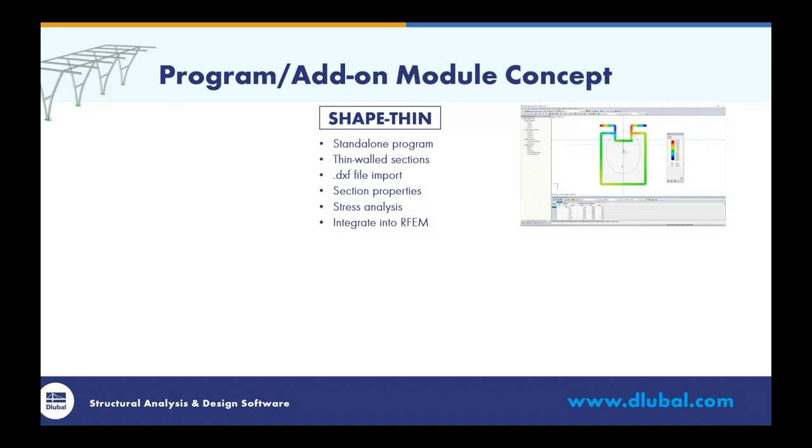These section properties will be calculated. You also have the ability to run a basic stress analysis directly within the program, which we won't be taking advantage of today, but it is an opportunity to do so. Then we take these cross sections along with their properties and integrate them into our FEA program, RFEM.

RFEM, again, is a separate program, and this is where we can model our structure entirely. We also can integrate with BIM software such as Revit, Tekla, and AutoCAD. We can fully load the structure and set up our load combinations, again according to the ASCE 7 as well as many other international standards, and eventually we get a full analysis.

Now, the analysis will provide us with design internal forces, deflections, support reactions, and we can take this analysis information into our own tools to do the design. Now if we'd like to do design within RFEM, this is where we'd want to take advantage of the design add-on modules, and in particular, today we'll be looking at RF-ALUMINIUM ADM.

So this is nothing more than a dialog box within RFEM that allows us to do member design for aluminum per the ADM 2010, the 2015, and we have both ASD and LRFD. This does include both ultimate and serviceability design, so we can check deflections as well. This also includes custom extruded sections, which we'll see today, where we take this section from SHAPE-THIN into RFEM and design it per the ADM.

Now, this is for unwelded member design. Hopefully at some point in the future we hope to add the welded checks, but for now keep in mind that it is only for unwelded members.

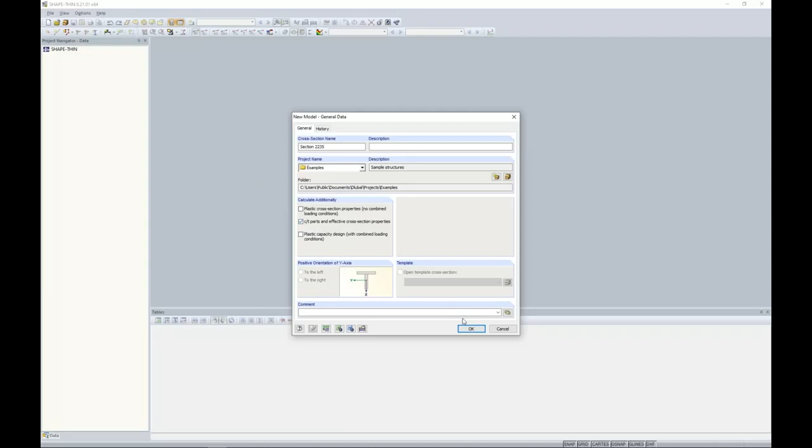This includes flanges, webs, any of the lips or extruded sections. Why this is so incredibly powerful is that when we take this information of these width to thickness ratios into RFEM and eventually into the aluminum design module, we can actually check all of them for local buckling. This is not something other programs can do, but it requires a bit more additional work within SHAPE-THIN itself to define this section, and we'll go ahead and see that now.

When I click import, we are brought into our graphical view where we can place the DXF background layer. There are a few options for how we want to place this DXF file, and I'll choose this one where I can further edit it. I select this center node, snap to my origin point, right click to exit this dialog box, and now you can see this background layer here.

It's not so simple that we can just mesh based on this import to calculate the cross-section properties. We somewhat need to trace over this background layer again to determine the width to thickness ratios for eventually local buckling. But we do have some powerful tools that allow us to do that fairly easily.

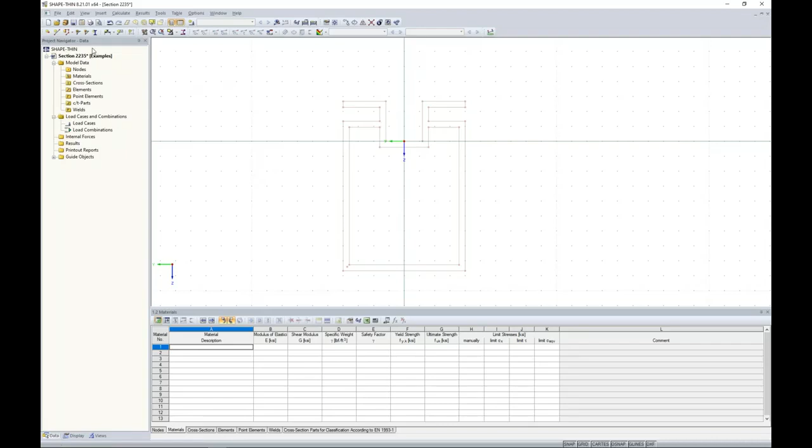Under edit, we have set elements with DXF template. The first option is to set the center lines. I zoom in and select two lines, and you'll notice the program automatically places a center line between the two selection lines. I'll focus mostly on the left side of the structure here, because once I define my elements on the left side, I can mirror it to the right side.

In addition to setting the center lines, we have this fourth option to set the elements. We can manually draw in our elements with a new line, but we want to take advantage of these tools that make our life a little bit easier within SHAPE-THIN.

So I want to set my material now. I can open up my material database, and on the left we have our filters. We can filter to metal, to aluminum, to the ASTM, and eventually the ADM 2015. We have quite a long list of all the aluminum materials directly from the standard.

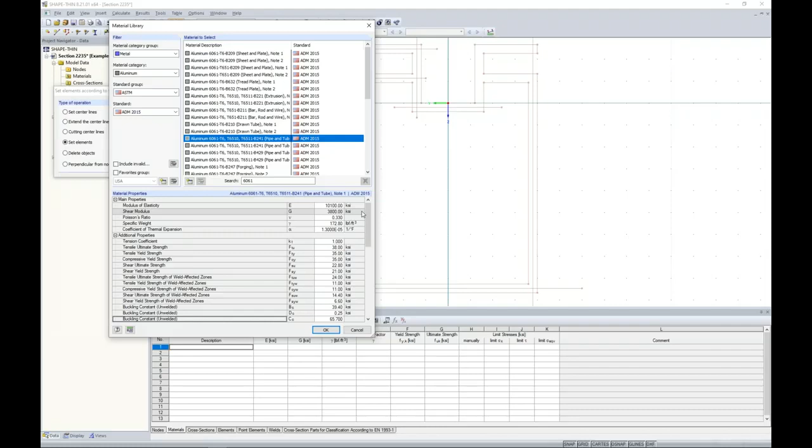If I want to search by a particular material, for example, I can type in 6061 and see all the applicable materials, where I'll choose 6061 T6 for pipes and tubes. Now all of my material properties are defined here. Quite honestly, the material definition isn't so important within SHAPE-THIN if you're not doing a general stress analysis, which we're not today. Once we get into RFEM, we'll actually have to redefine the material anyway, but this is just a good introduction of where you can find the materials within the database.

Now what I can do is simply click on these center lines, and the program detects where the outside boundary lines are for the thickness of these elements.

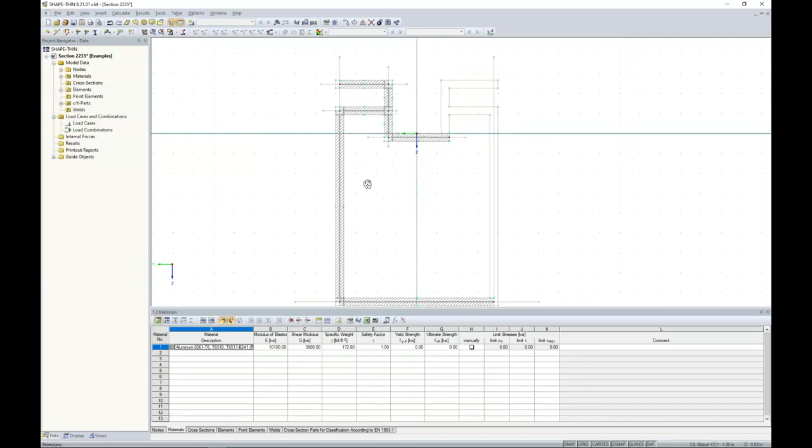Once I've completed, for the most part, the left side of the structure, you'll notice up here I want to actually drag this one element to the end. No problem, I can just drag and drop it, and it will snap right to that end point.

I can highlight all of my elements here and use my mirror tool. The mirror tool is exactly like what we'd find in AutoCAD, for example, where we can create a copy. We can mirror about the global z-axis and the origin point. I click OK, and now the program has created all of the elements on the right-hand side. It does create a couple small segments that I can just simply delete with my keyboard.

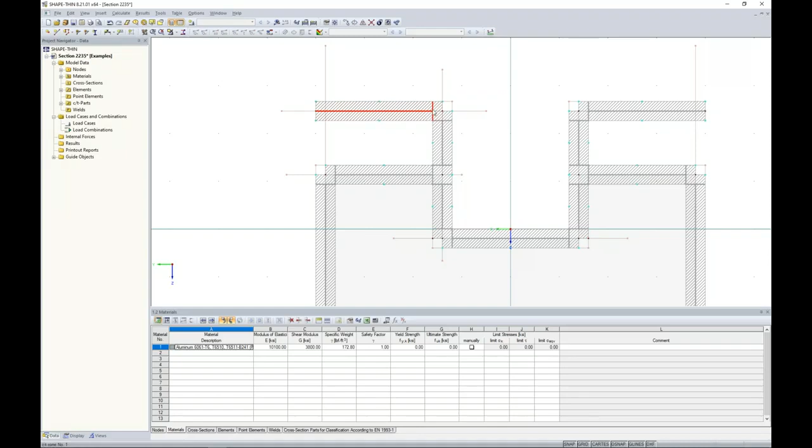Now you'll see these symbols at each element, and this is the width to thickness symbols, those C over T parts. This is what's recognizing width to thickness, but even more so, you'll notice that at these closed ends we have what's called, looks like a T symbol, but at the open ends we don't have that same symbol. This again is important for aluminum design to tell the program how the edges are supported. Over on the right hand side we can see that it's supported, but over on the left hand side it's not supported. Again, important for local buckling.

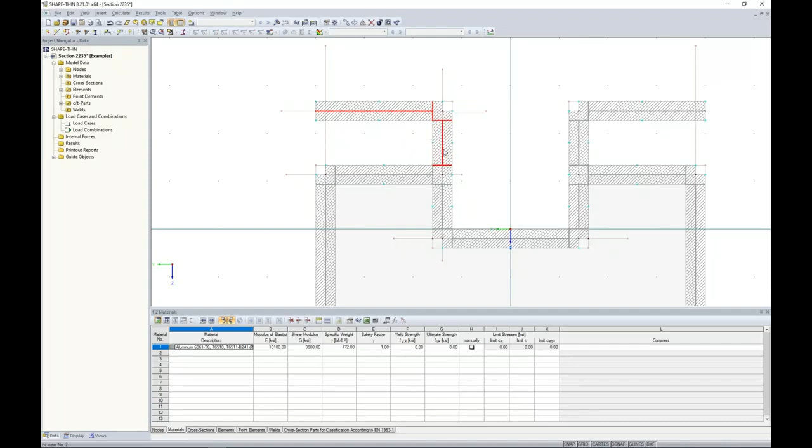When we look at one of these other elements that's supported on both sides, we see that T-type symbol on both sides.

So that's all that we need to do, and now we're ready to run our calculation to determine the cross-section properties. When I go to run the calculation, I will immediately get an error, and it says material number 1 Fy is not positive.

This is the yield strength for my aluminum, and I can immediately look down here to my table, and the program jumps to Fy where it's set to 0. The reason for that is because aluminum has different yield strengths depending on if it's for tension, for compression, or for shear. So all we need to do is set some type of placeholder here. Fy equal to 30 is perfectly fine. That's the reason why the program populates 0 there.

So we can rerun our calculation, and now we can see that we are presented with our results. Most importantly, if we take a look at table 4.1 for section properties, the program has automatically calculated all of the cross-section properties for us, including area, moment of inertia, warping, things like that. So everything has been done automatically according to my calculation.

Now it's very important that I save these results. You have to save the results with the cross-section properties, because in order to integrate in RFEM, we need to know those, and that only occurs with the saved results. We will get a message in RFEM when you try to integrate a SHAPE-THIN section without running a calculation first. So that's all that is required from the SHAPE-THIN side.

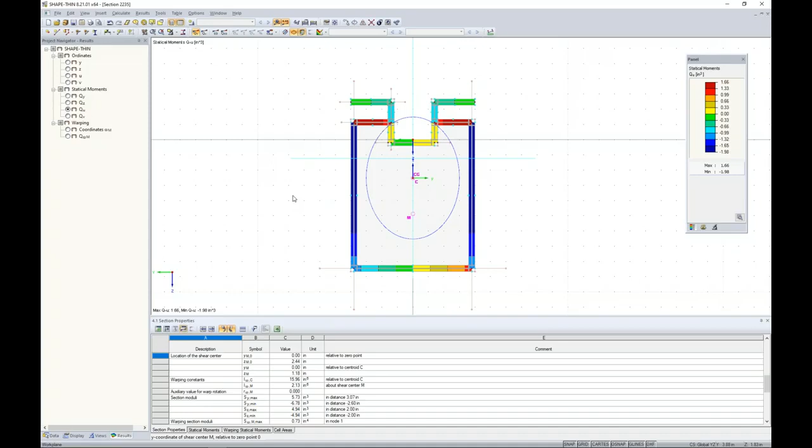So now what we can do is jump to RFEM. And in RFEM, you'll notice it has a very similar interface to SHAPE-THIN. So what's great is that if you know RFEM pretty well, then SHAPE-THIN should come pretty naturally.

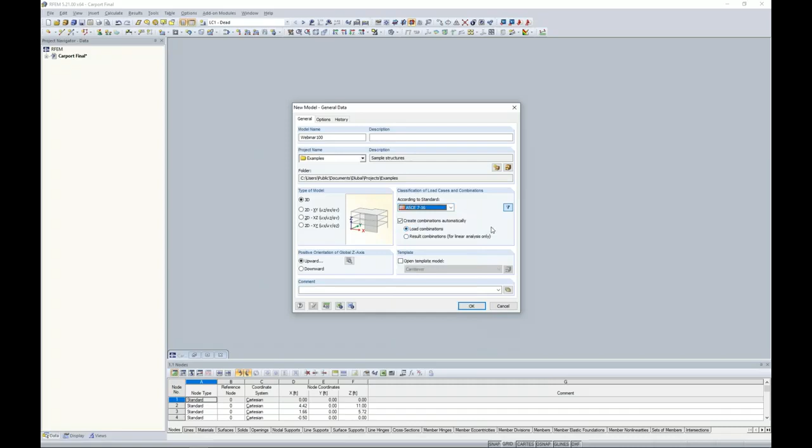We want to give this one a name, so we'll call this one Webinar 100. The type of model is 3D. We can generate the load combinations automatically according to the ASCE 7 2016. You can see in this drop-down box we have many other international standards as well, including the NBC 2015. You can always uncheck this checkbox here, and that allows us to manually create the load combinations instead. But today we want to take advantage of the load combination generator, so we click OK, and we are brought into our main program RFEM.

To give a quick overview, for those of you who are not familiar with RFEM, we have our graphic window right here in the center, and we'll begin to model our structure, and we'll see that built up visually here. Down at the bottom is our table, and we can always import and export data to and from Microsoft Excel. This includes our results that will eventually be presented to us in table format as well.

Over on the left is our project navigator. As we begin to generate this model, all of my input data, including my loads, my load cases, and combinations, will be available to me within the project navigator so that I can make quick changes to entire cross sections or to entire material groups.

If we scroll down a bit further, this is our long list of add-on modules. This is again why we have the concept of only pay for what you use, because quite likely you won't utilize most of these add-on modules depending on the materials or the international standards that you utilize for your projects. Finally, we have our tools up at the top, which we'll be utilizing today.

That brings us to the creation of our first column here, where we will go up to our quick tool to draw a new member. So when we choose this option, we want to select the member type beam. We can open up our cross-section library.

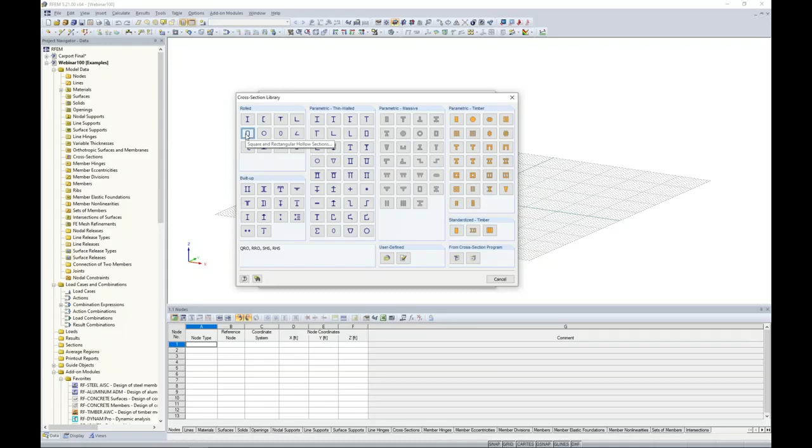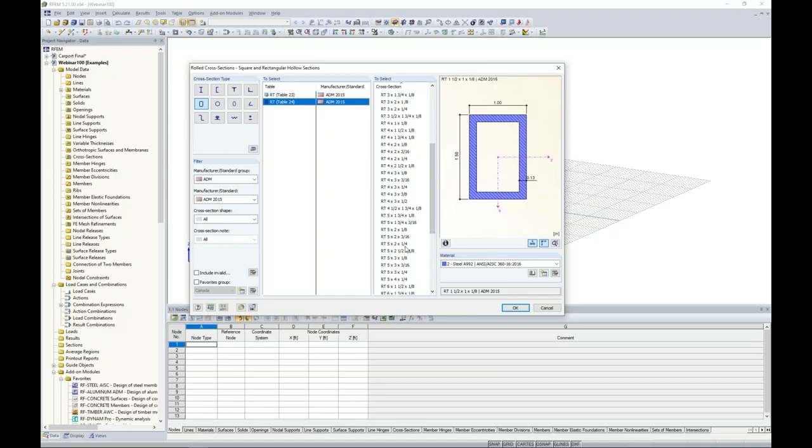For aluminum sections, we will typically be working with the parametric thin-walled sections, or we can take advantage of the ADM sections directly from the standard itself. So with that, we will choose a hollow square section for today. I click on my HSS sections, filter over to the ADM, and we'll see an additional filter to the ADM 2015. Now for my first column, I want to select a 5 by 2 by 1/4, and I can just choose it right here in my drop-down box.

Now the material by default when we first open up the program is 4,000 psi concrete or steel A992. So what we need to do is choose a new aluminum material from our database.

Well, that's quite easy by launching our material database, and this should look very familiar. It's almost exactly like what we saw within SHAPE-THIN. We can use our filters over on the left to filter to metal, aluminum, ASTM, and 2015. Once again, I can type in 6061 and select 6061T6 from my list here for pipes and tubes. All of my material properties are presented in this table.

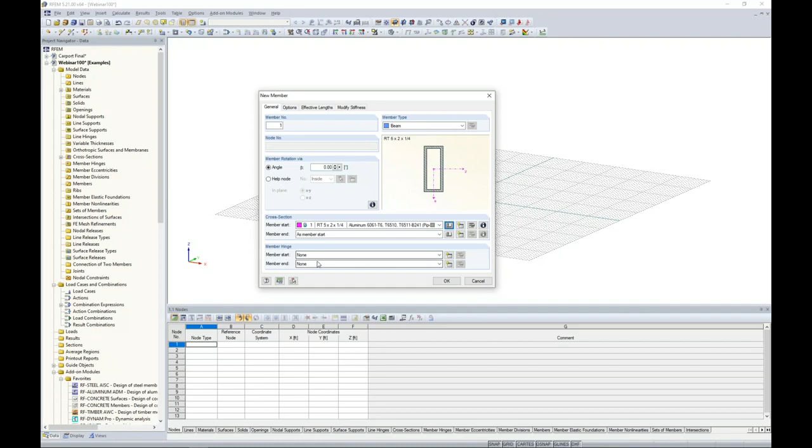I click OK, I click OK. And just to preface this, our model today will be fully fixed, but if you did want to set a pinned member end, you would do so within the same dialog box by creating a new member hinge. Leaving everything fully fixed, that is what the type none means, so we'll go with that for now. So we want to begin by drawing our column, but I want to change around my drawing grid here to the vertical direction.

I can do so by changing my work plane into the XZ plane. I can scroll down, and instead of a straight line, I actually want to create a curved column, and I can do so by selecting an arc here.

So I snap to the origin at 0, 0, 0, and then my second point can either be defined on my work plane here, but in my particular case, I don't have exactly 1 foot increments for my second point, which is what the default is for my drawing grid. So what I can do is just type in the coordinate points directly at 4.42, 0, and 11.

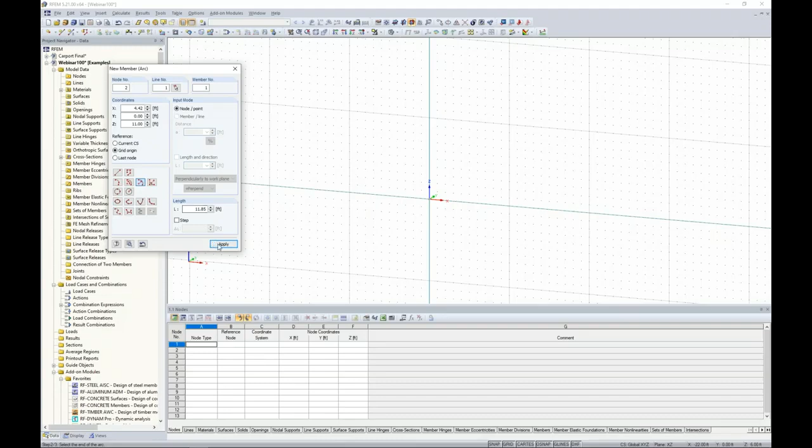Now you want to make sure not to drag your mouse outside this dialog box because as you'll see, everything resets to the current position of my mouse on the work plane. So we'll retype that in at 4.42, 0, and 11. We scroll down here to apply. And now you can either define the radius by clicking on the work plane, or I can just type in 30 feet on my keyboard and hit enter. And so now we should see the curved aluminum column shown here.

In a similar sense, we want to go back and draw a new member. And I want to take advantage of the exact same cross section, the same material. I click OK, and we want to create another curved member. So we'll choose the arc option.

Now my first point, again, doesn't fall at these 1 foot increments, so I can specify negative 0.5, 0, and 0. I click apply. Now my second point is going to be negative 3.5, 0, and 11, and I can hit apply. Now you'll notice that my radius is actually curving the wrong way.

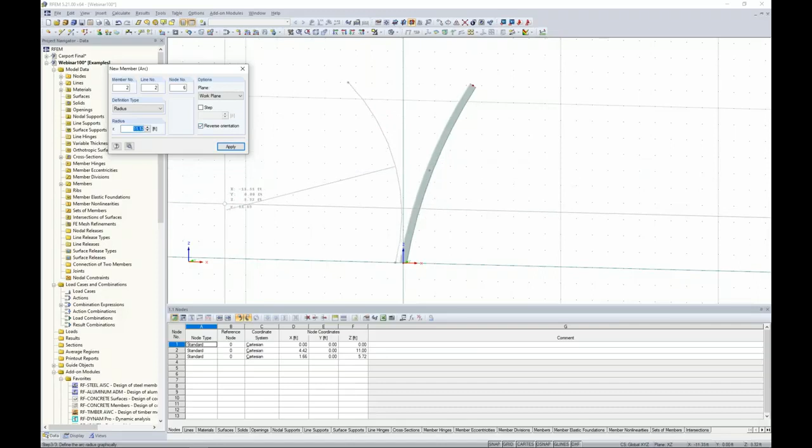Well, that's no problem. All I need to do is check the checkbox for reverse orientation. I'll type in 40 feet on my keyboard and hit enter. And so now we have our second curved aluminum column here.

The next thing to do is to apply some type of intermediate brace between these two columns, and I want to do so at some nodes along the member length that I need to create. So I can right click on my right column and divide the member by a certain distance.

With this distance, I have the opportunity to choose the projected direction Z. So what I want to do is add a node that is 5.5 feet in the vertical direction starting at the base of the column. You can see here which side is the member start and the member end based on this black arrow here. I type in 5.5 feet for my member start. I click OK. And so now I have divided this member, which has created an intermediate node there.

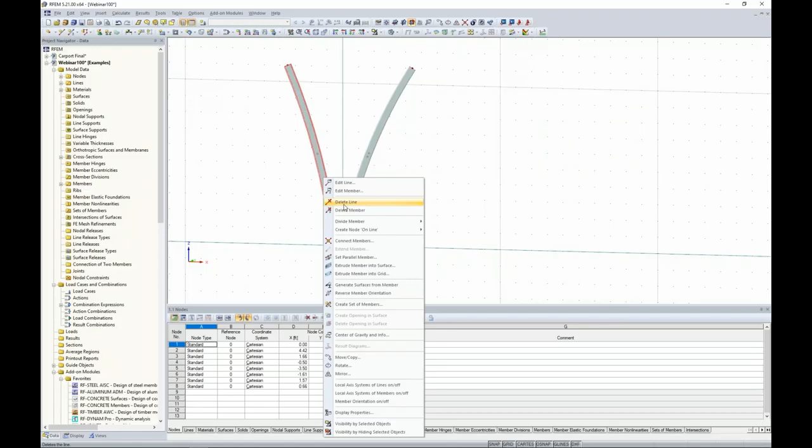I'm going to do the same thing with the left column. I'm going to right click and divide the member by a certain distance. Again, we're going to choose the projected direction, but this time it's going to be 4 feet from the member end. You'll notice that we have the reverse orientation for this column, which is no problem at all. So now we have split apart this member as well.

I want to go back to drawing a new single member. And once again, I'm taking advantage of the exact same cross section, the same material. I click OK, but this time instead of the member being a curved element, it will be straight, where I can snap to those new nodes that I have just created to add a small intermediate brace here.

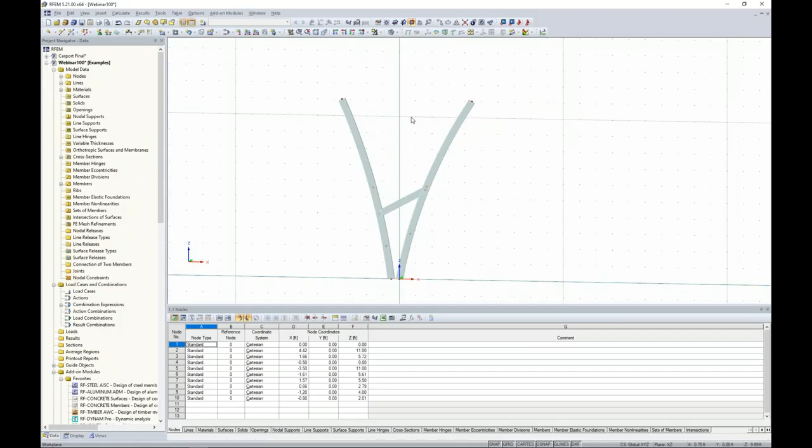Okay, so moving on to the top of our carport canopy structure, we want to import in that SHAPE-THIN section. So what I can do is to go to draw a new member, which we are very familiar with, and open up my cross-section database.

You'll notice that once this populates over on the right-hand side in the very lower corner, we can import the cross-section from SHAPE-THIN. So when I do this, we will browse to the file location of where I saved my custom cross-section so we can see it here.

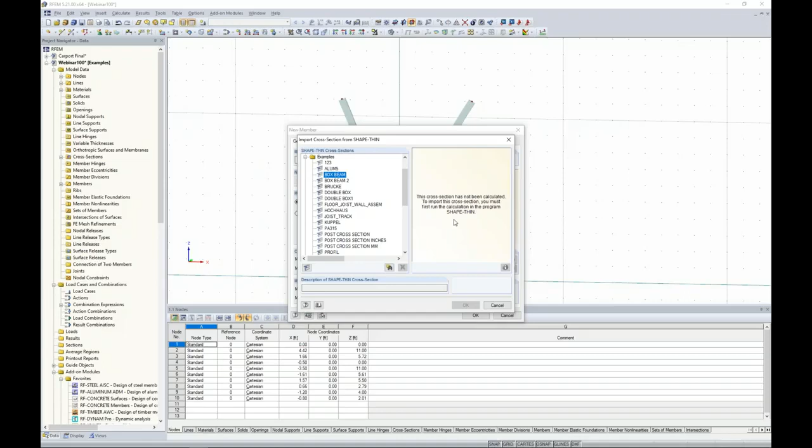By the way, if you were trying to import in a cross-section where the results weren't saved, you would see some type of warning or note like this, just telling you the cross-section hasn't been calculated. Go back to SHAPE-THIN and do so. This is why the results need to be saved with the SHAPE-THIN file.

So we can see here section 2 that we have just created. We want to import that in. Now notice when we did that, it defaulted to the first material, concrete 4000 PSI, that we have available in our model. So we actually want to edit the cross-section, and instead of concrete, we're going to choose the aluminum material that we've already defined in the model.

So it's now always available for any additional members that we create within this file. So I choose aluminum 6061. And we can see here that everything looks okay with the material and the cross-section set now.

I'd like to move my drawing grid so that the origin is now placed at the top of the left column. I can do so by selecting this button up here to set the origin of the grid work plane, and I move to the top of the left column.

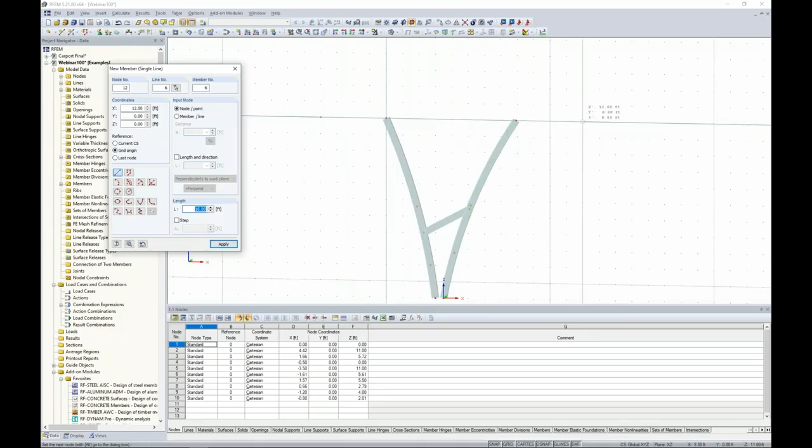Now I'm still within the dialog box option to draw my new member. So I'm going to choose a point that is about 4 feet away from the top of the column on the left, and we will span about 3 feet to the column on the right.

What's also powerful, if I turn off my drawing grid here and I zoom in, is that we do bring in the exact rendered view of this custom cross-section. So it's somewhat nice to see the orientation of the member and how it's framing in to these columns that we have just created.

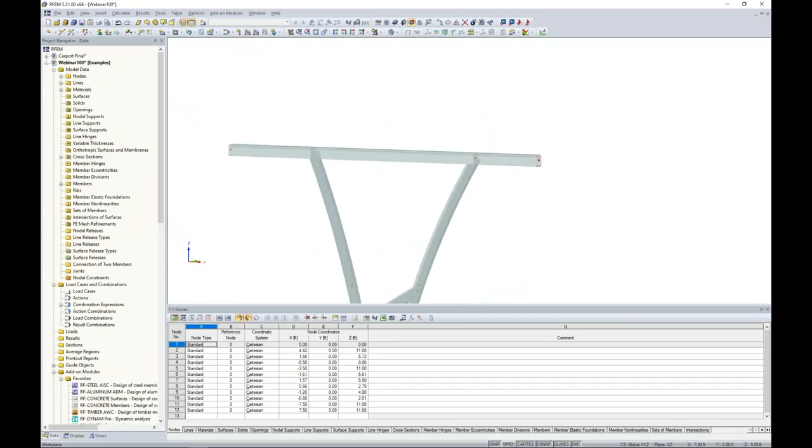So once we have created this main beam up top, I'm going to hold down my control key and select only my members. You'll notice that I'm paying careful attention to not select the nodes. But there are a couple nodes that I do want to include. So by holding down my control key, I'm going to select the node at the top of my right column and the rear node. Now there is a specific reason why I'm doing this.

I want to go to my Move Copy tool in my toolbar. Move copy, nothing too fancy about this. We want to make 6 copies in the global Y direction of 4.5 feet. And under the Edit Expanded settings, what we have the ability to do is to create lines between copied nodes.

So this is why I was careful to only select a couple of nodes that I was interested in. And even more so, we can assign a cross-section to those lines. And we can create a new cross-section type by going to a new member.

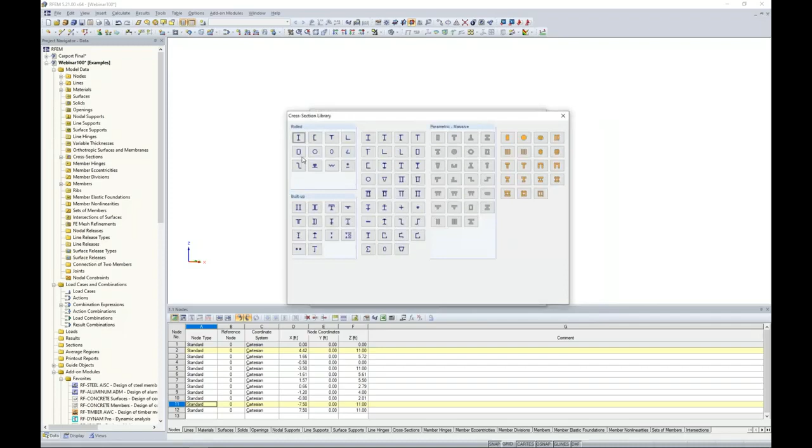This should bring us to a familiar dialog box where we can launch our cross-section library once again, because I do want to create a rectangular hollow section here. So I choose this option, and over on the left we will see our ADM filters once again, and I can scroll down in my list to choose a 3x3 by 0.125.

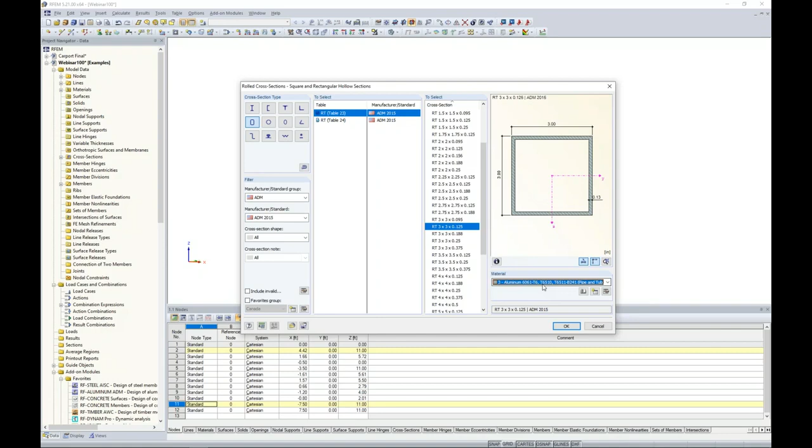I select my material from this drop-down box. Remember, it's already available to us because we have defined it within the model. I click OK, I click OK, and we're back in this Move Copy dialog box. I click OK once again, and what you'll notice happen is that not only did we make copies, but the program has placed these intermediate beams between our copied frames.

So it's just taking a step out of the equation where we don't have to manually draw these beams in here. I want to take a few of these main frames, and I'm holding down my control key and selecting them, and I hit delete on my keyboard because they are not necessary.

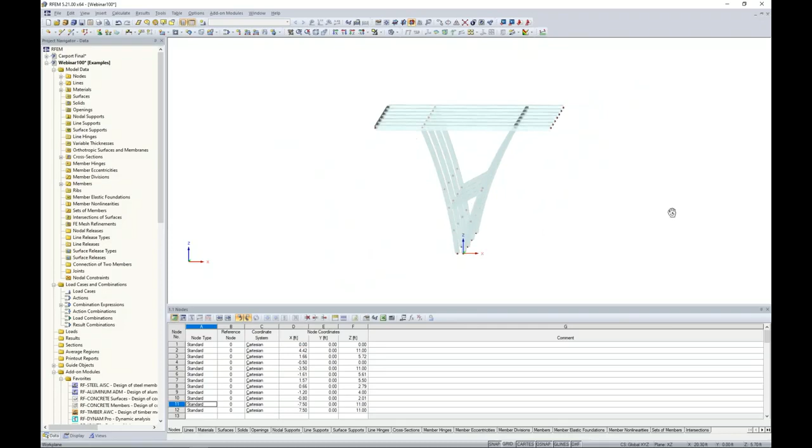So now we are presented with, for the most part, a majority of our modeling is done with the carport canopy structure. A couple things to add. Number one is that if I wanted to slope this roof at 5 degrees.

And normally with sloping the roof, it might be a little bit difficult because we'd have to figure out at what elevation all of these nodes should be placed at depending on their distance away from where the slope should begin. But we do, once again, have a nice feature within RFEM that allows us to do that automatically.

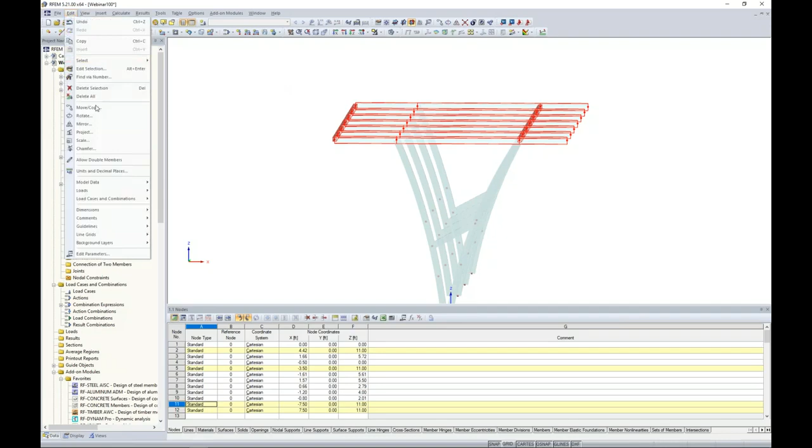So I select all of my roof members here, and under Edit, we have the shear tool. With the shear tool, we can define an angle of -5 degrees. We want to rotate it about the global y-axis, and we want to rotate it in the direction of z.

Then I can graphically pick the point where I'd like the rotation to begin. So I choose at the top of my right column any one of these points. The program populates the coordinates. I click OK, and now my roof has a 5 degree slope to it. Again, just a nice feature so that we don't have to manually determine what all these different elevations are based on a 5 degree slope.

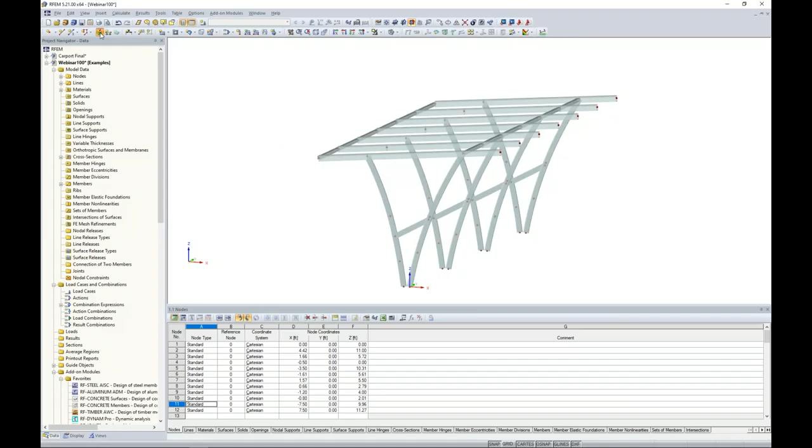The last and final thing to do with modeling of our structure is, of course, to support it. So we can go up here to a new nodal support. Now we have a few default options, including hinged and rigid, pin type support, or fully fixed. We can always create our own type of nodal support, which you'll see are 6 degrees of freedom here for rotation and translation.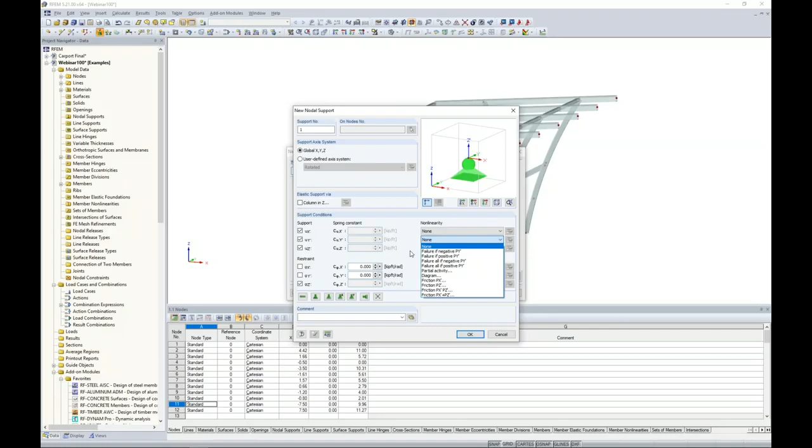If you have partial fixity for somewhere in between fully fixed and fully released, you can set that. Or because RFEM is a nonlinear analysis program, you can set these support nonlinearities so that perhaps the support fails in uplift, for example, or sliding or friction or anything of the sort with partial activity. For today, we want to choose the default fully rigid option.

I click OK. All that I need to do is to highlight across the bottom of my structure, and now those fixed supports are applied to the bottom of those columns. So we are essentially done with the modeling, and we want to move on to loading.

And what we need to start off with loading is, of course, defining our different load cases. We can do so within the option up here to define a new load case. This will bring up our load cases and combinations dialog box. The first load case to create will be dead load.

The action category is set to dead. Action categories are important because this tells the program exactly what load factors to apply to each load case based on the ASCE 7 or whatever standard you're using for the automatic load combination generation.

The self-weight is automatically checked here for dead load, but when we create a new load case, and we'll call this one live load with the action category of live, we want self-weight to be unchecked because we don't want to account for it twice.

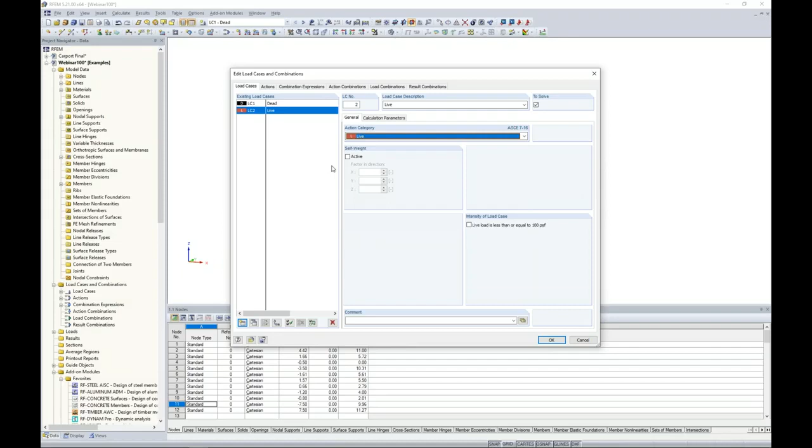Now, because this is a carport structure, maybe we want to consider the possibility of impact loads. Perhaps a car could unfortunately drive into one of these columns, and we want to account for that. So we'll create a couple of additional live load cases for impact.

So we'll call this one Impact 1, and the action category is set to live. We can make a copy of this load case and rename it to Impact 2. I'm going to create a load case here for Wind 1 with the action category of Wind. And once again, I'll make a copy of this one and create a second load case for Wind 2.

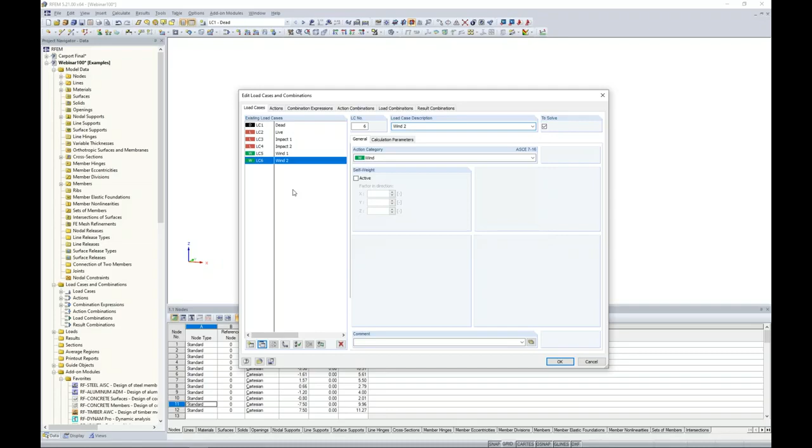Now, of course, you'll probably have many more load cases for your project design, but for today's example, we will just stick with these. So under the Actions tab, this is important because here are my actions that I've defined: dead, live, and wind. Now, under live, I have my live load, which will be some type of area load at the top of my roof structure.

I want that to always be acting within these load combinations, but Impact 1 and Impact 2, I don't want everything to act simultaneously as we have it set here. Instead, I want Impact 1 to apply or Impact 2 to apply along with the first live load. So how we can do that is by setting the option differently here.

So live load can be set to no group, Impact 1 can be set to group 1, and so can Impact 2. So now the program will apply Impact 1 or Impact 2. Alternatively, it will not apply them at the same time.

It's a similar concept for wind load. Wind loads are automatically by default set to alternatively, so it won't apply wind load 1 plus wind load 2, it will apply wind load 1 or wind 2 within our load combinations.

The combination expressions, this is just the program letting me know that it will create LRFD load combinations as well as ASD load combinations. If we have any question about what those load combinations look like, we can click this little info button to see them listed directly from the standard.

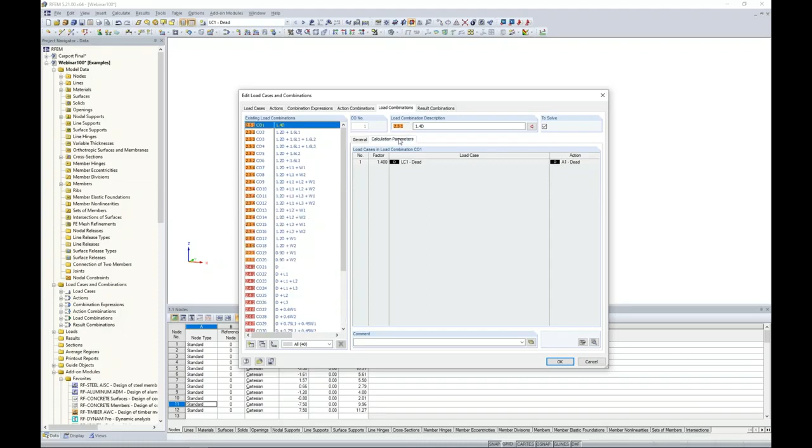Now, probably most important is the actual load combinations tab here, because this shows all of my LRFD load combinations in orange and my ASD load combinations in red. The calculation parameters for load combinations by default is set to second order analysis, considering both big P delta and little p delta for all members.

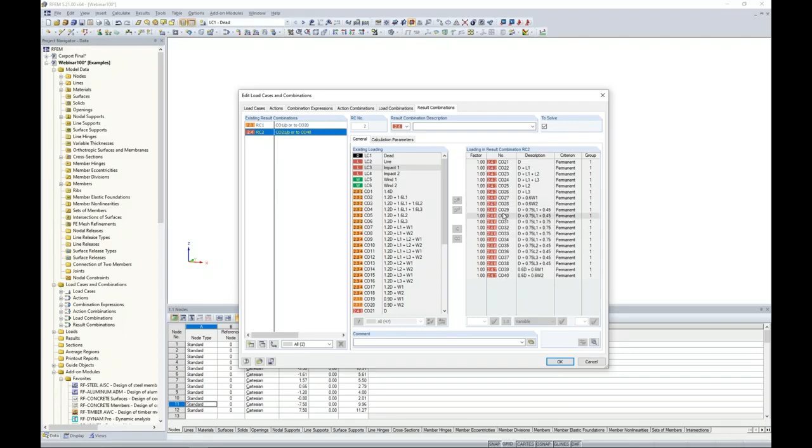The result combination is nothing more than an envelope solution. The program creates a result combination for all of my LRFD load combinations, and we have a result combination for my ASD load combinations. This allows us to graphically or within our tables see the max and min results within all of these load combinations combined - essentially just a result summary.

Once we are done defining our different load cases, we need to actually apply the loads to the structure. So we're going to select dead load from my drop-down box here, and I want to apply a downward area load to the top of my structure to account for some PV panels that will be placed on top of there.

Under Tools, we can go to Generate Loads from Area Loads on Members via a plane. Rather than having to manually define what all these different member loads are based on their tributary area, we can let the program do that for us. So we choose the load direction in the global Z, which will be the downward direction, and give it a magnitude of negative 0.02 kips per square foot.

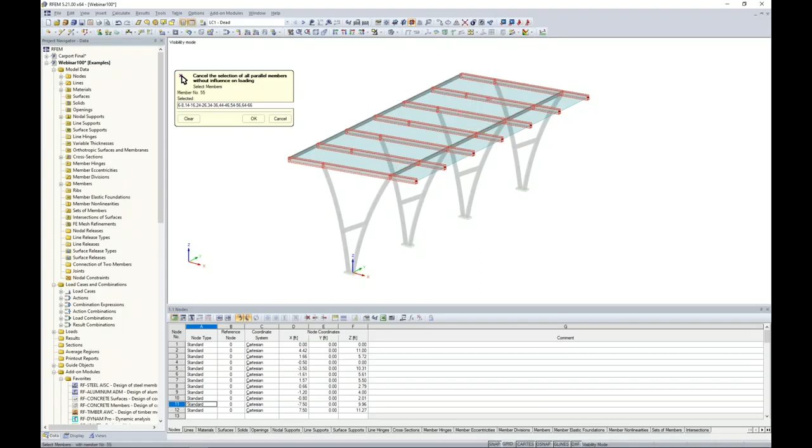I am going to select my corner nodes by graphically clicking on the 4 points. Now we also have the ability to exclude members parallel to a particular member. What I mean is I can select one of these intermediate beams framing in and out of the page. I select one, and you'll notice that all the rest are unselected, if we do not want the load applied to those, but rather our main beams instead.

I click OK, and now you can see our area load generated. Even more importantly, if we right click and display separately, we can see the area load magnitude split up for each individual member based on its tributary width.

We now want to scroll to live load, and it's the exact same concept here. We'll go back to Tools, Generate Loads from Area Loads on Members via a plane. What's nice is that the program remembers all of my settings from the previous application, so all I need to do is change my magnitude to something slightly smaller. I click OK, and now for live load you can see the member loads applied based on their tributary area.

Now for impact load, this comes from the ASCE 7 2016, specifically section 453 for vehicle barrier systems. The code tells us that for impact loads, we should consider a 6 kip load applied anywhere between 1 foot 6 inches to 2 feet 3 inches above the floor. For this application, I want to consider an impact load on my center columns here.

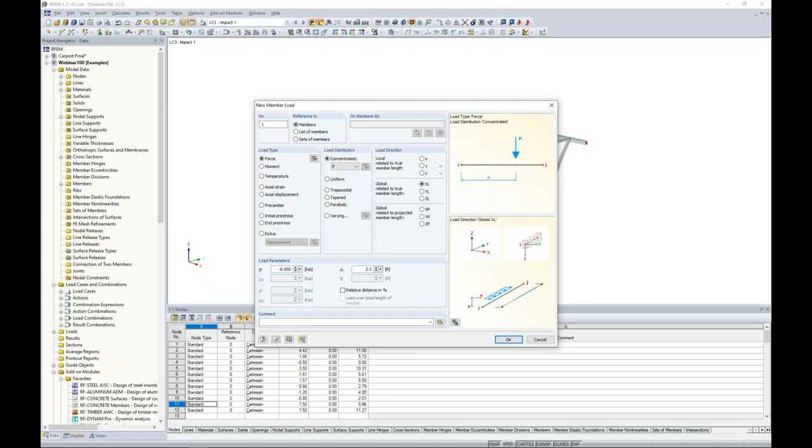I'm going to go to a new member load, and instead of applying a uniform load, I can just change this to a concentrated load. With a concentrated load, we want to apply this in the global X direction, the lateral direction. We want to give it a magnitude of -6 kips, applied 2 feet from the member start. So I click OK.

Then I can just click on my column directly to apply that impact load. I scroll to the next load case, impact 2, and you'll notice that my option to apply loads is still active, so I can easily click on my column for the next load case to apply my second impact load. I right-click to exit, and now as we scroll to the two different impact loads you can see why we wouldn't want these acting at the same time, but rather wanted either one or the other.

Now, of course, maybe we'd want to add some impact loads to our exterior columns as well, but we'll just keep that for the simple application for today.

Now, for wind loads, we do have an automatic wind and snow load generator. The snow load generator would be efficient for this canopy type structure. The wind loads, unfortunately, cannot be used because we only have partially enclosed and enclosed structure options for our wind load generator. Typically, for canopies, you would be considered as open structures, so we will need to manually apply our loads for today. So what we want to do is just go back to the area loads on members via plane in order to apply those.

Before I do, when we're manually taking a look at these calculations for our wind loads based on open structures, or maybe we have some spreadsheets to do so, I just want to touch on a tool that we have on our website. If you go to Dlubal.com and under solutions, you'll see the GeoZone tool.

What we have done is we have integrated the maps for snow, wind, and seismic directly from the ASCE 7. You'll also see the NBC standard as well as many other international standards. This is also integrated with Google Maps technology, so what we can do for our project, for example, is type in the location address, or click directly on the map.

We're looking at wind for risk category 1 here. We can see that the basic wind velocity is set at 105 miles per hour. So this is just something that's a little bit more efficient than opening up the code and having to flip through all those different maps. You can take advantage of this.

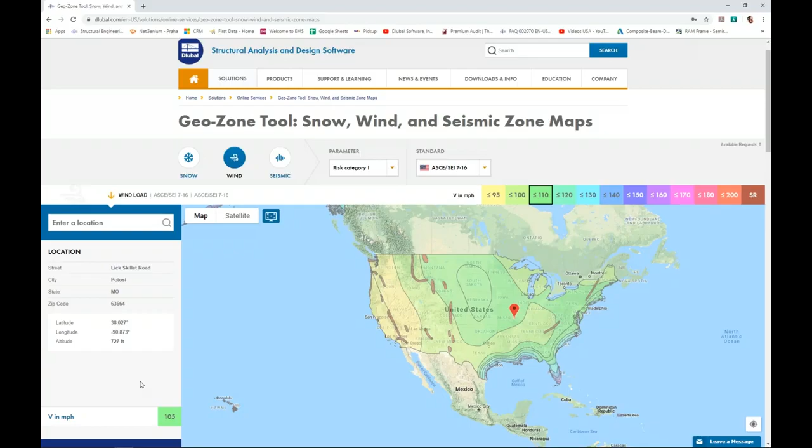In reality, we'd probably want to apply some lateral loads to our columns as well, but for simplicity, we'll just move on with this lateral application.

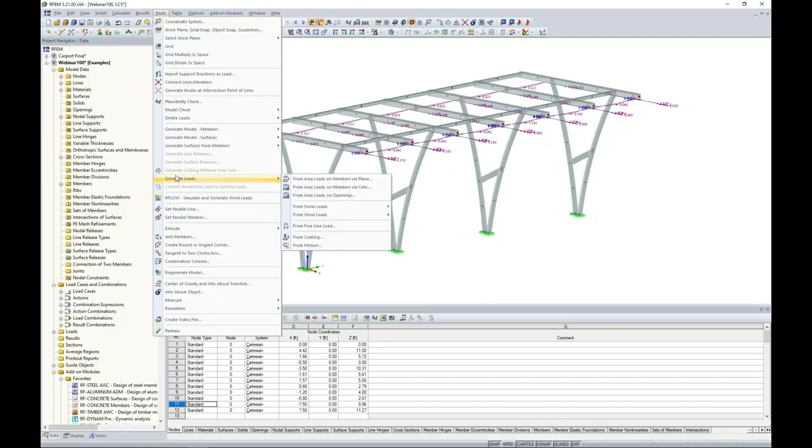So under tools, we also want to maybe apply a downward load. For this, we can just modify the load direction in the global Z direction, modify the magnitude to negative 0.005, and maybe we actually do want to exclude those intermediate beams here from my downward wind loads. I click OK, so all within this same wind load case 1, we can see a downward wind load along with the lateral load applied.

Now, a nice trick is that for wind load 2, I'd like to essentially keep the same load application, but I just want to modify either the magnitude or the load direction. So what we can do instead of going back and once again applying our area loads with the load generator is go to my load cases and combinations.

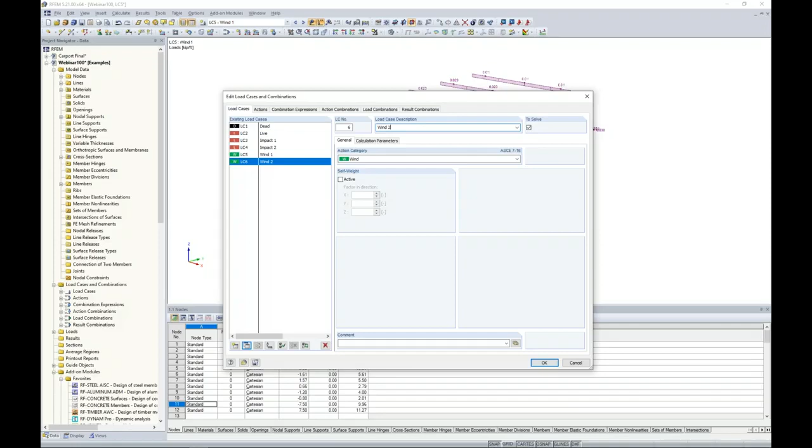I'm going to take wind 2 and completely delete it. So now when I take wind 1 and make a copy and rename it to wind load 2, the benefit is that since I've already applied my loads to my load case, it will copy the loads along with the load case to wind load 2. So now when I click OK, I've copied all those loads from wind load 1, and you can see now I'm looking at wind 2.

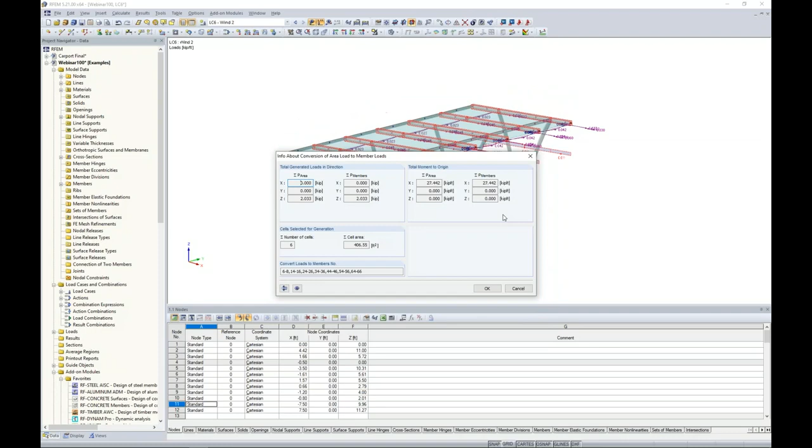All I need to do is double click on my top load here and reverse the orientation, reverse the magnitude for an uplift force instead. So that's just a nice way to quickly redefine loads by copying the actual load case itself.

Now that we have defined all of our different load cases, we can scroll through to the different load combinations and see these applied to the structure at once, including live loads, impact loads, wind loads. Everything is shown here.

Before we are ready to run our analysis, there is one thing I want to discuss from the ADM, and this is the stability requirements according to section C2. I actually did a previous webinar around 2 years ago, but everything is still applicable to design today according to the ADM 2015. I went into much more detail about the stability requirements in Chapter C, so certainly refer to that on our YouTube channel or on our website. You can just search ADM and that will bring up that previous webinar.

But today, what I do want to apply is the reduced stiffness requirements from section C2. The code tells us that we need to reduce the flexural stiffness by a tau sub b factor. The tau sub b factor is an equation, and it needs to be iterated based on the axial forces within our member.

Additionally, there's a 0.8 factor that should be applied to bending and axial. And lucky for us, these requirements are almost identical to what the AISC requires.

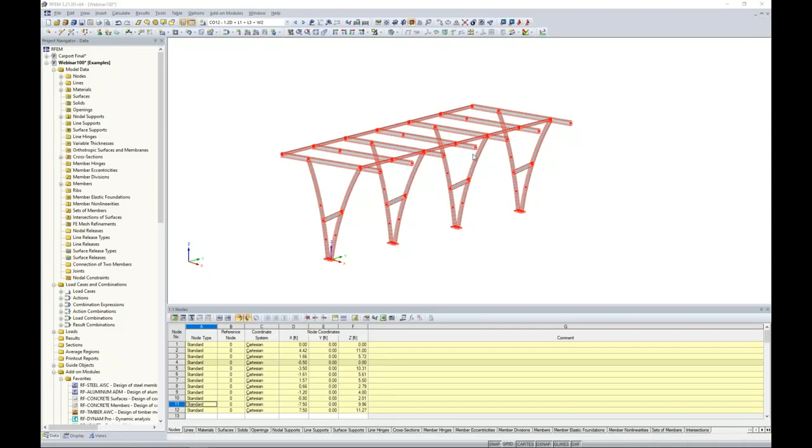In the program, when we highlight all of our members, we can right-click to edit the member. When this dialog box pops up, you'll see a Modify Stiffness tab.

This allows us to modify the stiffness according to the AISC 360. Again, the ADM 2015 lines up exactly with the requirements from the AISC. We will determine what that tau sub b factor is, and we'll also apply a 0.8 factor to the flexural and axial stiffness. This will be applied to all members that contribute to the lateral stability. It's also a conservative approach to apply this to all members, including gravity members.

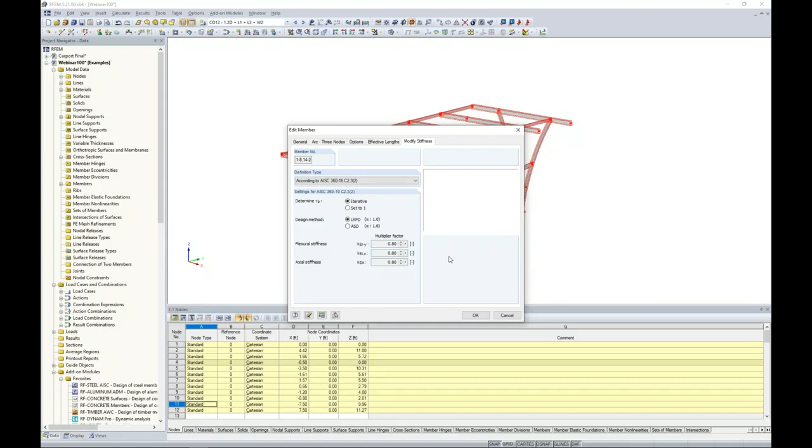So I click OK. And you might be asking yourself, the stiffness reduction is great for my design combinations for the ultimate limit state, but for serviceability or deflection, I don't want to reduce that stiffness. So how do we separate that out?

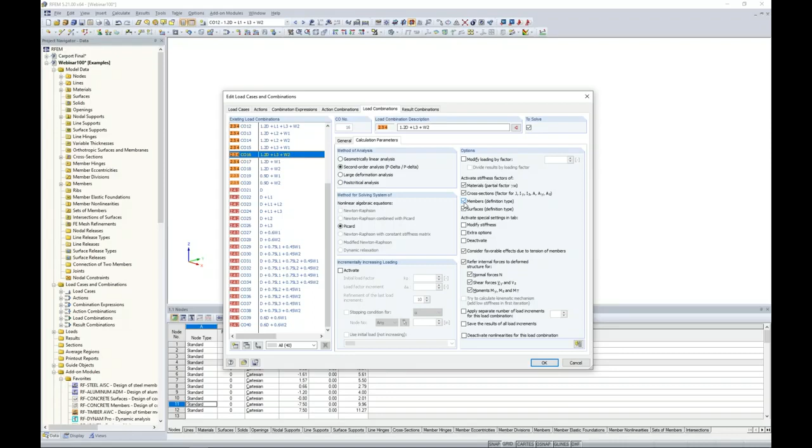We can do so directly within our load cases and load combinations tab. I can select all of my ASD load combinations by holding down shift. Under the calculation parameters, we have the ability to uncheck the members here for the stiffness factors. This will no longer reduce the stiffness for all of my ASD load combinations, which are typically used for deflection. But if we take a look at some of our LRFD load combinations, that checkbox is activated again, so we will reduce the stiffness based on the stability requirements within the ADM.

So now with that said, we are finally ready to run our calculation. We go to calculate all, and the program will cycle through about 40 or so load combinations, running a nonlinear analysis to account for secondary effects of P-delta and P-little-delta.

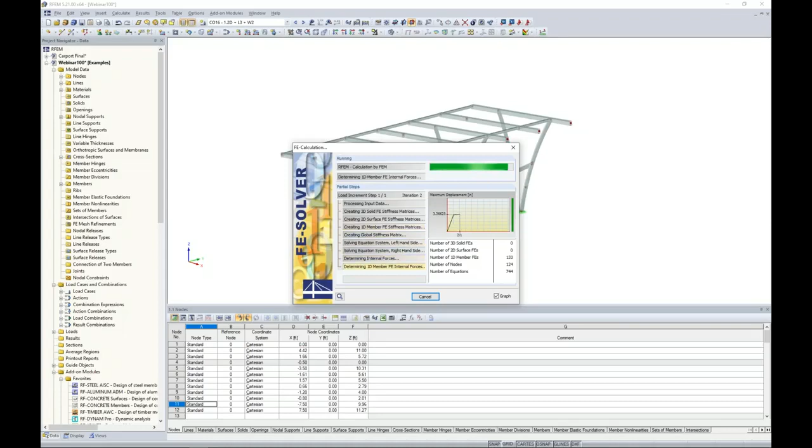Once this is done running, we'll be presented with our results directly within RFEM. We'll notice now that we have a results tab available to us, and currently we're looking at the deformations of our structure, which is a little difficult to see since it's just based on the center line.

Under the display tab, this controls everything that we're viewing graphically. We can turn on and off different elements, change the view, and use the results tree. We can expand out the deformations for members and change this to cross sections colored. I can even smooth my color transition to make it look a little nicer.

Now I can scroll through to my different load combinations just to see the reaction of the structure under the different applied loads. If we're also interested in seeing how the structure behaves, we can play the animation here. This is useful because if we incorrectly modeled something, we'd probably see some odd deflections in this video. It's a nice feature that we can export out and save to our computer as a video file as well.

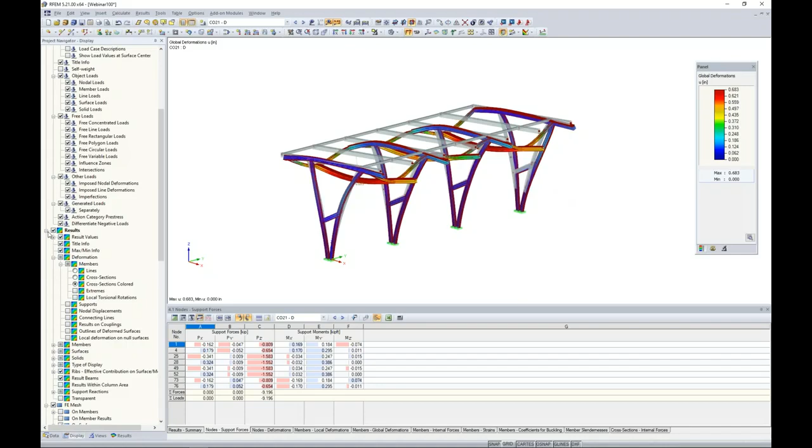In addition to deflections, we're also very interested in member internal forces. We can go back to our results tab, and I can zoom in to view these members in closer detail, and we can take a look at axial forces, shear forces, and bending moments. These are all available to me graphically.

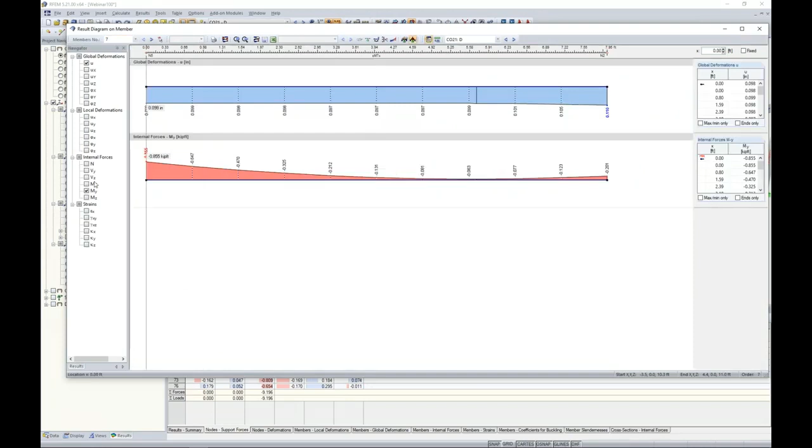I can also right-click on any one of these members to go to the results diagram. This will show me in more detail where I can turn on and off these internal forces and deflections, what's going on along the member length. I can also scroll through to different load combinations here and export them out to my printout report, maybe in a bit more detail than what we can see graphically.

In the same concept, we can also view our support reactions. We can turn those on graphically, and again, all this information is available to us within our tables. We're currently looking at table 4.1 for support forces. You'll notice the table synced up with RFEM here, with the big red arrow showing me exactly where I'm at according to this table that I'm clicking in.

We can export all of this information, support reactions and internal forces, to our own design tools, such as Microsoft Excel, or maybe some in-house tools to provide the design.

But if we want to take it a step further within RFEM, this is where we want to take advantage of our design add-on module, RF-ALUMINUM ADM. So we can activate the add-on module within our project navigator over on the left, or we can access the add-on modules under our drop-down at the top.

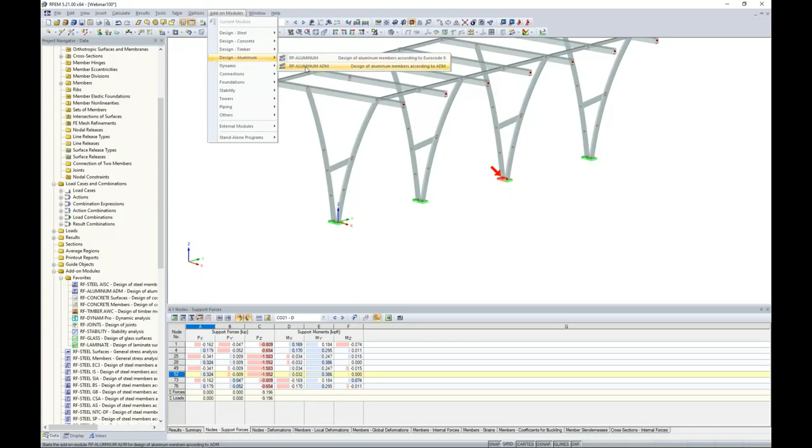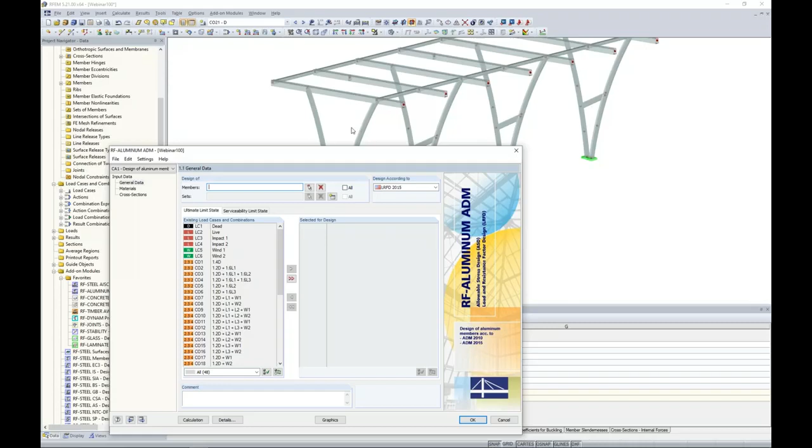This is nice because they are categorized a little bit nicer, where we can go to design of aluminum per the ADM. Now, when I choose one of these add-on modules, notice that it's just a dialog box that pops up within our main program. I don't have to worry about remodeling any of this information or redefining cross-sections, materials, load combinations. It's all brought in. What we're doing here is specifying information that is specific to the ADM module, including things like unbraced lengths or which load combinations we want to consider for design.

So I'd like to start off with a fairly simple case here for introduction into this module. I'm going to rename my case here to secondary beams. I click OK, and I want to select the beams that I would like to design for this first case. Well, I want to design these intermediate beams.

Now I can individually highlight these and select them, but a better option under the Views tab is to select my members by cross-section. I will choose the 3x3 cross-sections, and now you'll notice that everything is grayed out within the rest of my model. So now I can easily highlight the entire model by only selecting those 3x3 cross-sections.

We want to choose the LRFD 2015 for our design. And for our ultimate limit state, this is where we choose our LRFD load combinations. Serviceability limit state would be our ASD load combinations, again, brought in directly from RFEM, considering stiffness modifications and everything else that we've previously set.

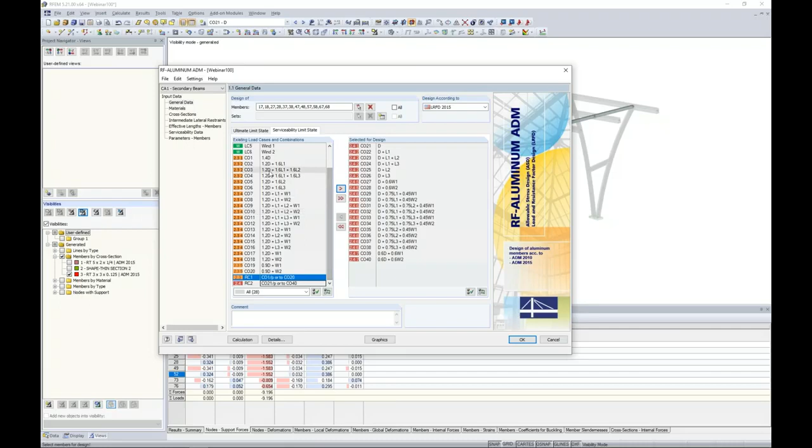All we need to do now is to simply move down our list over on the left. The materials are brought in from RFEM. We're still utilizing aluminum 6061. We have our cross sections here with our 3x3 with the cross section properties shown.

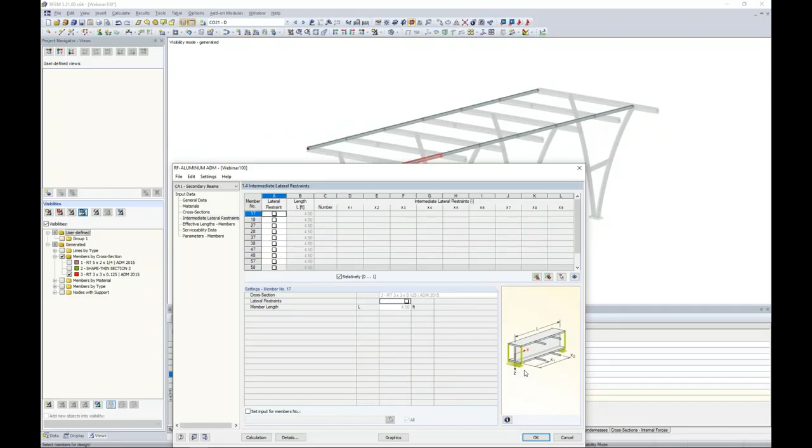Intermediate lateral restraints, if we had any top and bottom flange bracing. Now this isn't so applicable, for example, today with tube structures, but maybe you had some type of I-beam as shown, then you would set the intermediate lateral restraints under this table here.

The effective length - this is our stability design. We have strong axis buckling, weak axis buckling, lateral torsional buckling, and flexural torsional buckling. So to explain a little bit about all of these different options, you'll notice here that we have the effective length factors. Section C3 from the ADM tells us that we can use K equal to 1.0 unless a smaller value can of course be justified. So we'll go ahead and leave all of these values set to 1.0.

Now the effective length, which is our K times our unbraced length, is our next column here. By default, everything will go ahead and populate according to the member's length back in RFEM. So in this case, they're all 4.5 feet. Same thing for unbraced length in the weak axis direction. So if by chance you didn't model in some members here, or maybe those PV panels are bracing these members laterally, for both strong and weak axis direction, then you can go ahead and adjust the unbraced lengths here. But for today, we'll just keep all of those to default to the full member length.

Lateral torsional and flexural torsional buckling are very interesting because we have the ability, again, to set unbraced lengths here for LW, which would be the lateral torsional buckling length, or LT, which is the flexural torsional or torsional buckling length. So if those differ from the full member length, you can adjust those here.

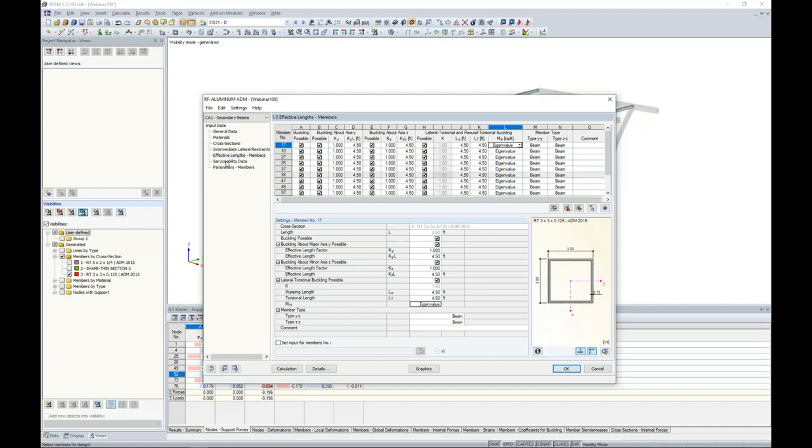Now, serviceability data—this is where I select the member reference within my dropdown, and then I graphically select all of the members here that I'm interested in for serviceability design. So I've highlighted all of these members, same thing that we're doing for ultimate limit state design.

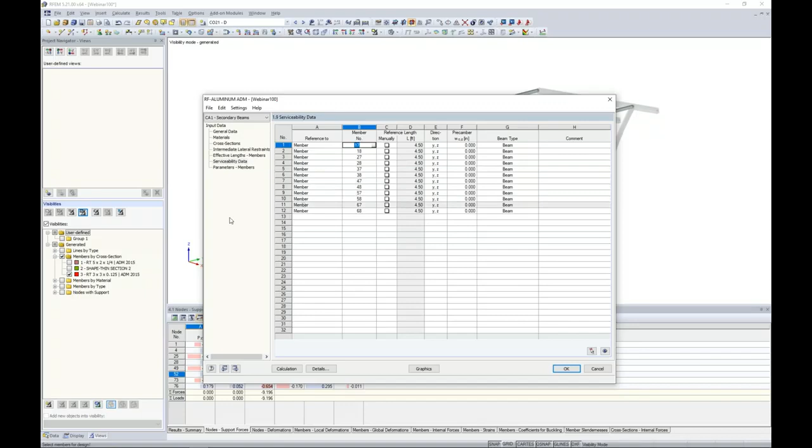Now, the reference length, once again, defaults to the full member length. We can put in here a pre-camber. We specify if it's a beam or a cantilever. I'll show you in just a minute exactly where we set the limiting deflection ratios, because we need something to compare this to, of course, to the deflections that the members are experiencing from the analysis.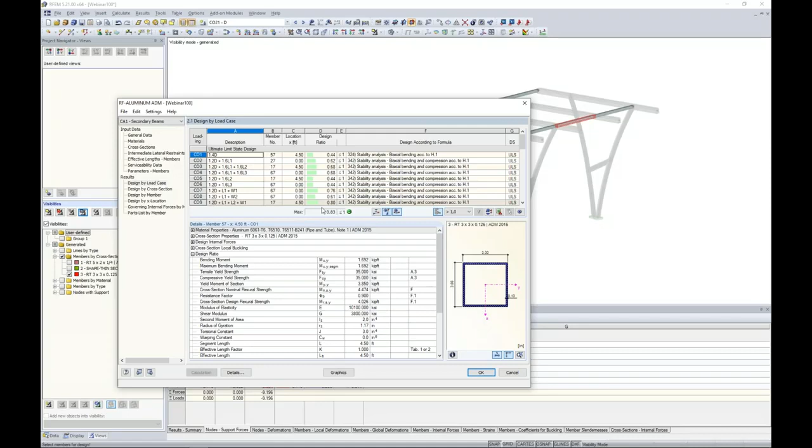So once we have defined all of this information, we hit calculation, and you'll actually see that the program solves this rather quick because we already have all of our internal forces from RFEM. We're just bringing them into this add-on module, applying the ADM calculations, including the quick little eigenvalue analysis for stability, and then ultimately we're coming up with our results.

Now we can view design by member. And again, when I'm looking at these tables, you'll notice that everything is synced up in the background. So I can take a look at this particular check. This big red arrow is telling me where the controlling internal force is for the axial check, for example, and biaxial bending according to chapter H.

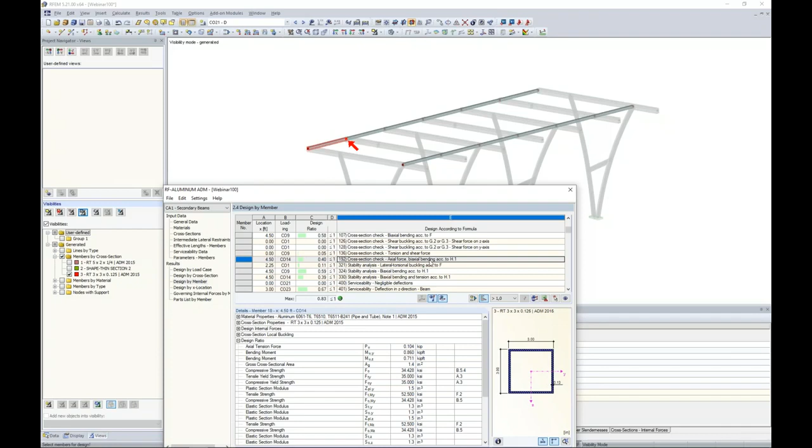What's also really powerful is that for each member, we're giving you the results for every check within the ADM. So you're going to see here shear checks, bending checks, biaxial bending, axial forces, and of course, lateral torsional buckling and stability checks for biaxial bending. The reason why we do this is because we don't really want to be a black box program, but we're trying to give you as much information as possible so that you can understand where the numbers have come from. In addition, you'll see all of the variables listed here along with the code references.

By all means, though, if we're not really interested in seeing all of this information, but we just want to know what is the controlling check for each member, we can easily use our filter option here to filter by max, and now we can see for each member exactly what's controlling.

So in many of these cases, stability is controlling, and I just want to point out that for any one of these stability checks, we actually can view a picture here, a graphic of our mode shape. So this is what's going on in the background when it's running this eigenvalue analysis to determine the critical buckling moment. Just a nice feature to see what's going on there.

Now, all of this information is available to us graphically, so we can click the graphics option. Now, we're within the RF-ALUMINIUM ADM module, just viewing these code check results graphically back in RFEM. So I can take a look at my ultimate limit state design, or if I want to turn off ultimate and view my serviceability limit state design visually, I can see both of those there.

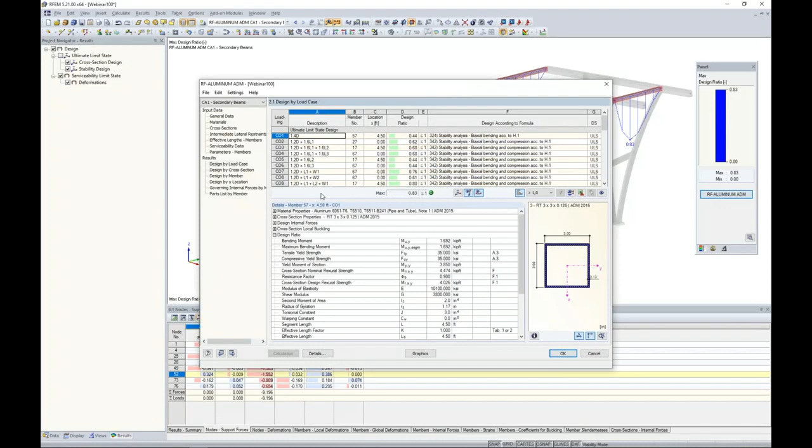We also can go back to the ADM module and view a parts list by member. Again, all this information can be exported directly to Microsoft Excel. So that's just a quick introduction to the aluminum ADM module with a fairly simple example for these beams.

The other quick example I want to show you is, of course, with our custom extruded sections that we brought in from SHAPE-THIN and how we can also design those within the module.

Notice that the program has broken apart these members here based on where they were framing into the columns. Actually, that's not a big deal at all.

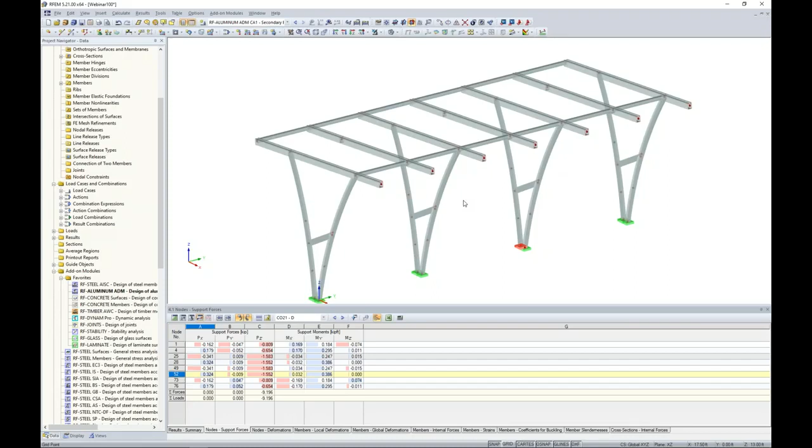Under the Views tab, I'm going to select all of my SHAPE-THIN sections and turn off my 3x3 sections. I can highlight all of my members here, right click, and under member we have the opportunity to create sets of members. The program groups these individual members into what's called a set of members.

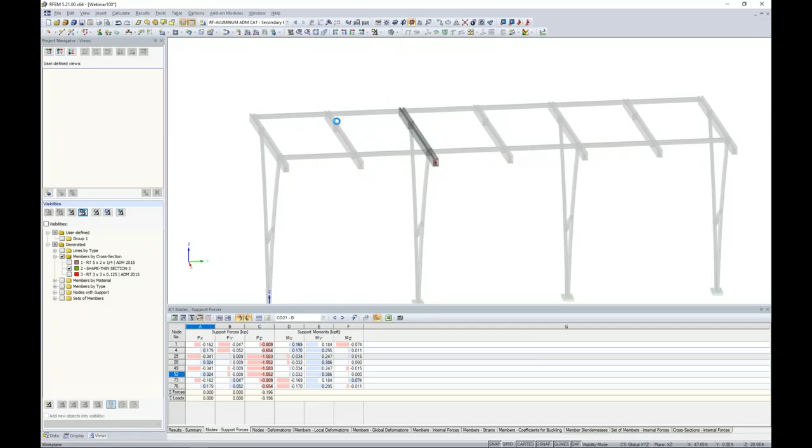You'll notice I didn't have to clear my results for the analysis. It doesn't affect the analysis whatsoever that these are broken apart into separate segments. But for design, maybe we're interested in designing this as one continuous member rather than individual segments—both are possible. I just want to show you the benefits of designing a set of members quickly, starting with the set of members shown highlighted here.

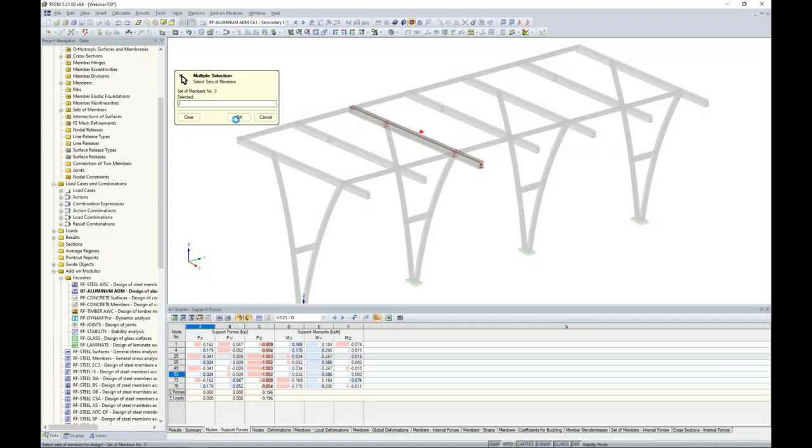We go back to our RF-ALUMINIUM ADM module and go to File, New Case. For this one I'll call it Main Beam. I click OK, and the program gives me the ability to always jump back to my secondary beam design—I've created a second case here in my dropdown. This time I want to design my set of members. I click OK. Quite honestly, not much is different with sets of members until we get to some of these later tables.

I want to select all of my LRFD load combinations according to ADM 2015. I'll skip over serviceability limit state design for the sake of time, so we'll only look at ultimate limit state design, moving from top to bottom with our tables. Materials, then the cross section—our SHAPE-THIN custom extruded section is available here with all the cross section properties we calculated way back when.

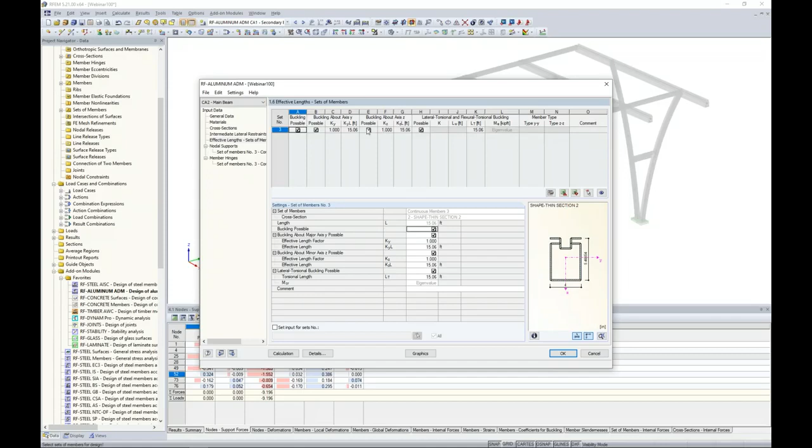The effective length table looks slightly different than what we saw for members—now it's effective lengths for sets of members, and some things are grayed out here, because everything is actually controlled under our next table for nodal supports.

Similar to members, for sets of members we are running an eigenvalue analysis for stability once again in the background. But what's more powerful about sets of members is that we have more control over how we specify those four degrees of freedom where our supports occur—whether they're fixed or released.

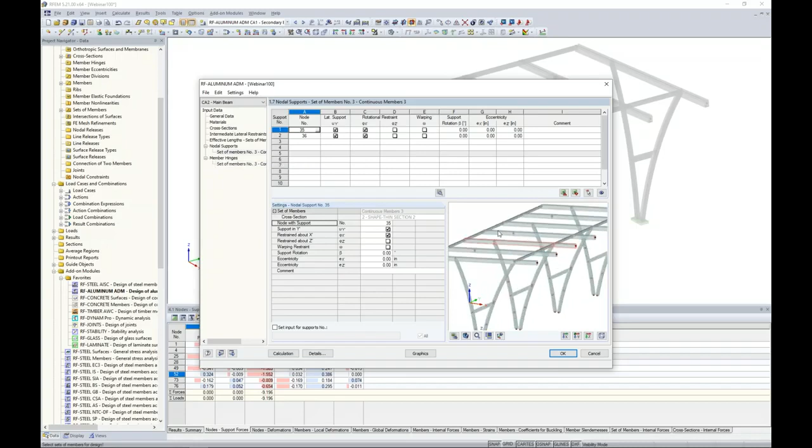Under nodal supports, which is a new table for sets of members, we can see our individual set of members here. I can isolate this to take a look at the set of members and where the program has automatically placed these supports.

Now, actually this is not correct, because I don't want to place a support on the right-hand side, but rather need to move it back to where my lateral members are framing in as well as my column. That's no problem—all I need to do is graphically select my new node and move it back to node 36. Let's try that again.

I want node 36 and also node 35. There we go—I've supported this individual set of members exactly where all these different members frame in. Now this is where I have my four degrees of freedom that I have control to set for sets of members.

I think we can all agree we do have lateral restraint because we have these transverse beams framing in at both support locations. Rotational restraint is the ability for the member to rotate about its own axis, and I'd agree we're restrained in that aspect as well.

Now, rotation about the vertical axis—I'd say for our front support here, with our column framing in, we do have restraint about the vertical axis for rotation. This isn't applicable for our example today, but if we had warping restraint, we could also set that at any one of these supports.

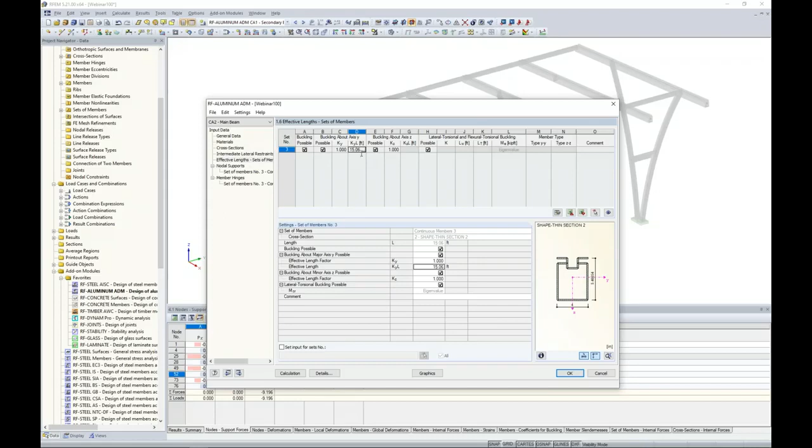What's also powerful about sets of members is that they don't necessarily have to be in a straight line. You can design a continuous member that doesn't lie in a straight line but is in the same plane. So for strong axis buckling, we do need to adjust this, and the worst case distance here is between our 2 columns at 15.06 feet.

So the last table here is member hinges. If we wanted to release any one of those 4 degrees of freedom along the set of members, we could do so here, but we don't have that for today's example.

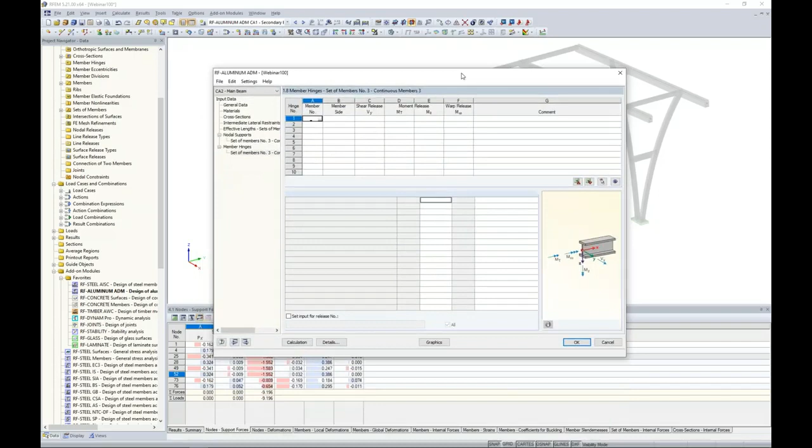So then I can just click calculate. Again, it solves within a quick second, and we're presented with our results, and we can view design by sets of members. So same concept here. We're going to present to you all of the different checks directly within the standard.

And I wanted to point out of course stability analysis for lateral torsional buckling. We can view our mode shape here for this set of members and what the program's actually doing in the background.

One thing I mentioned over and over again is the ability to check local buckling for these custom extruded sections. So that work that we put in within SHAPE-THIN for the element with the thickness ratios and whether it's closed or open on either end, well, you can see here that that's now all listed under the cross-section local buckling.

So every single element is listed here. It shows whether it's in tension or compression, how it's classified, the slenderness. So again, very powerful because not a lot of other programs have the capability. Of course, we can bring it in, we can do general design, but the ability to do local buckling for all of these individual lips and webs and flanges is pretty powerful.

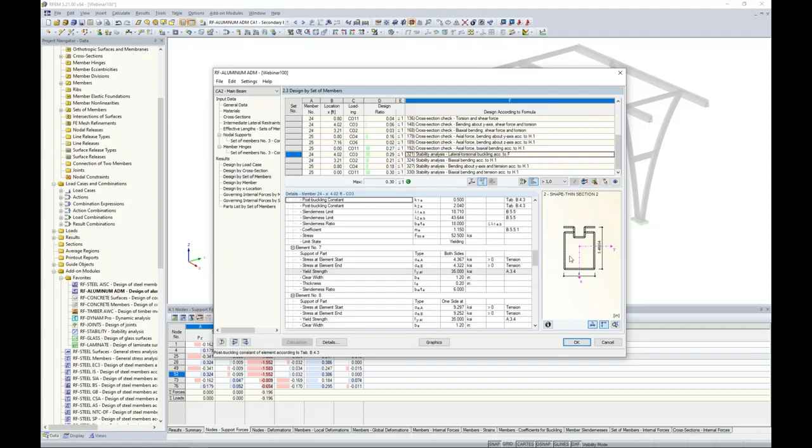Okay, so that's essentially what I wanted to quickly show you for design by sets of members, and that will actually bring us to the end of our webinar today.